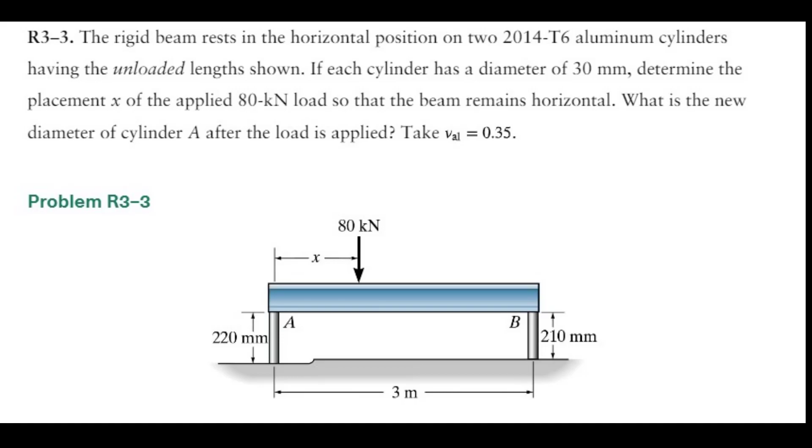All right, I have redrawn the problem as a free body diagram, and we're going to apply the equations of equilibrium. We're going to use the summation of forces in the y direction is equal to 0, and the summation of moments at A is equal to 0. And we're going to get the force B and the force A in terms of x. So we got force B is equal to 80 divided by 3 times x. Force A is 80 minus 80 divided by 3 times x.

We had stated that for this to be level, the change in the lengths of each column must be equal. So the strain is equal to delta L over the original length. If we set these equal to each other, we get the strain in A times 220 millimeters is equal to the strain in B times 210. We can then solve for strain, and the strain is going to be equal to the stress divided by E. E is constant for this one as well.

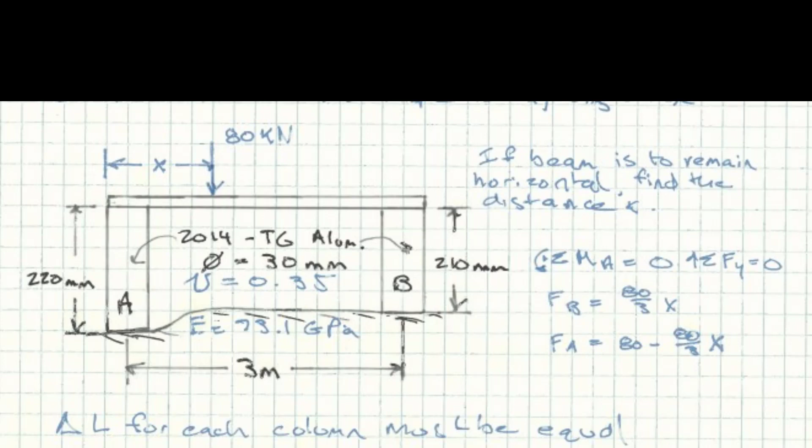So the stress of A is equal to force A divided by the area, and the stress at column B is equal to the force B divided by the area. We already have FA and FB in terms of x, so we put that in there. Then let's substitute those into that original equation, which is the stress of A divided by E times 220 millimeters is equal to the stress B divided by E times 210.

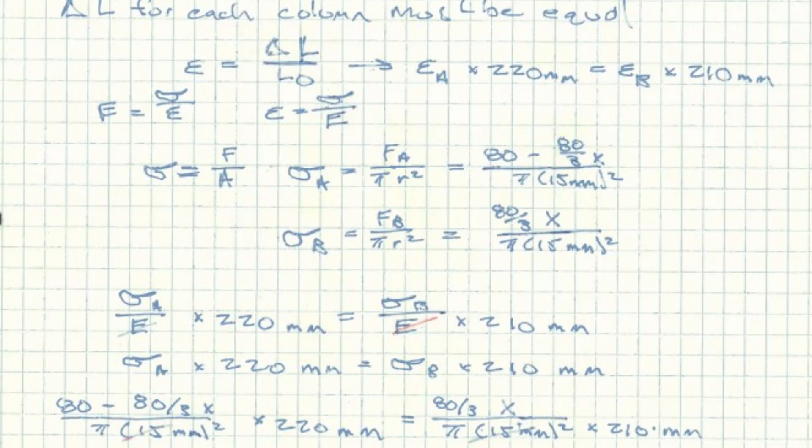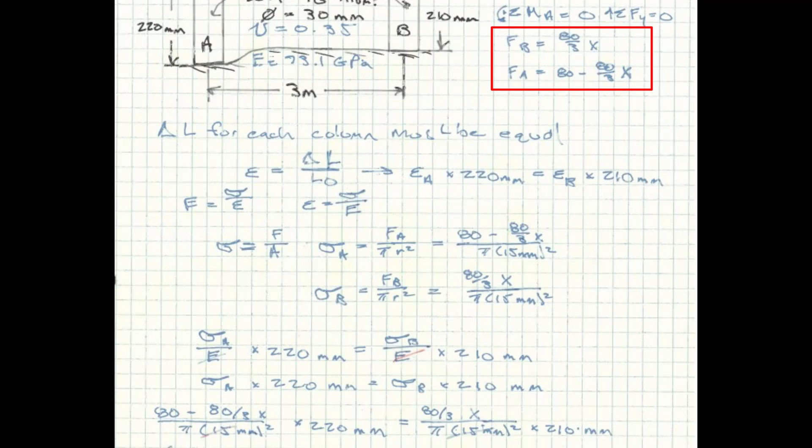Since E is the same because they're both made of aluminum, those drop out, and we get stress A times 220 millimeters is equal to stress B times 210 millimeters. So now let's put in the values for FA and FB, and then we can cross out the radius squared, because it's on both sides. So the area and the pi drop out, and we're left with an equation with one unknown, so we can solve for x, and we get x is equal to 1.535 millimeters.

Next, we use the new value of x and solve for the forces at A and B, and we get 39.06 kilonewtons for A and 40.934 kilonewtons for B. Since we're focusing on column A and how that diameter is changing, we first find the stress at A, which is simply force over area, and we get 55.27 megapascals for A and 57.91 megapascals for B.

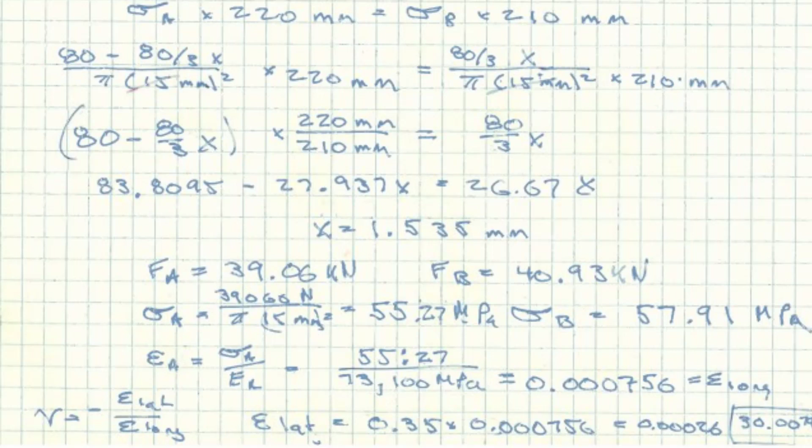Because we're just finding column A, we now find the strain at A. The strain of A is equal to the stress of A divided by the modulus of elasticity for aluminum, which is a lookup value. So that'll be our 55.27 megapascals divided by 73,100 megapascals, and that gives a longitudinal strain of 0.000756.

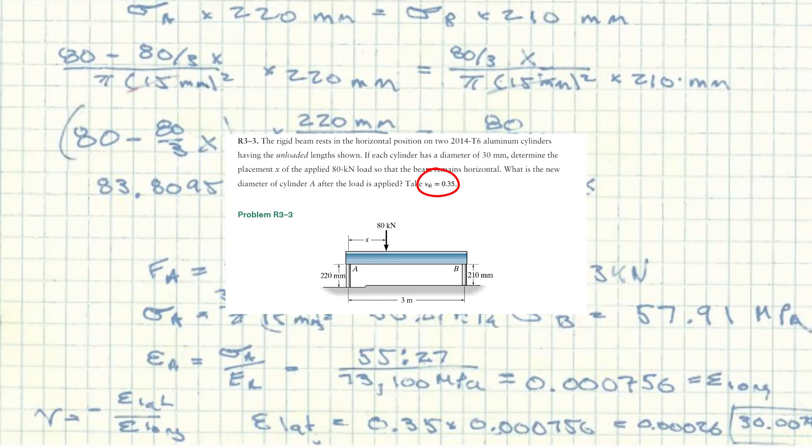We are given a Poisson's ratio equal to 0.35, and that is equal to the negative lateral strain divided by longitudinal strain. We're looking for lateral, how much it expands out. That is equal to 0.35 times the longitudinal strain, which we just solved for. That gives us 0.00026, which results in a new diameter of 30.0079 millimeters.